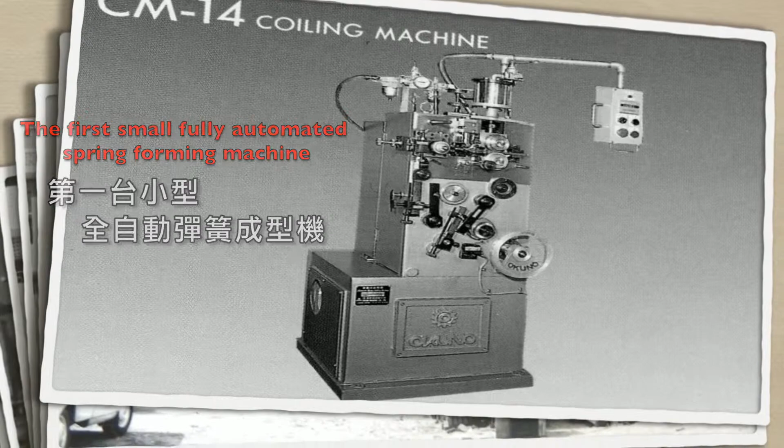A year after our establishment, SZS purchased an automated spring making machine from Okuno Mechanical Company in Japan. In 1968, a joint venture between SZS and Riken Industrial Spring Company established SZS Industrial Spring Machine Company.

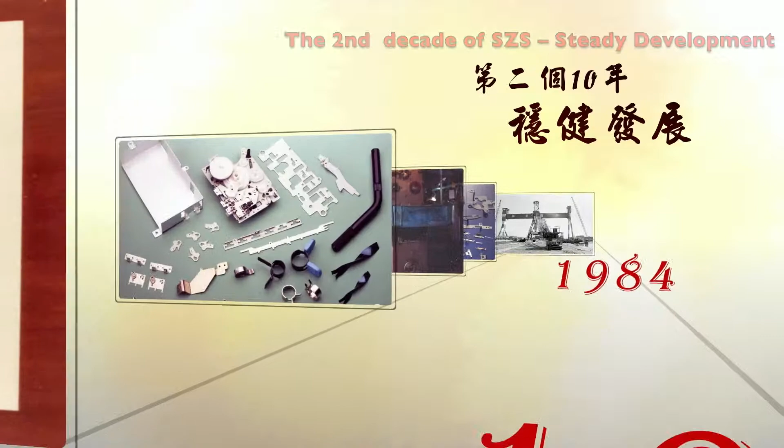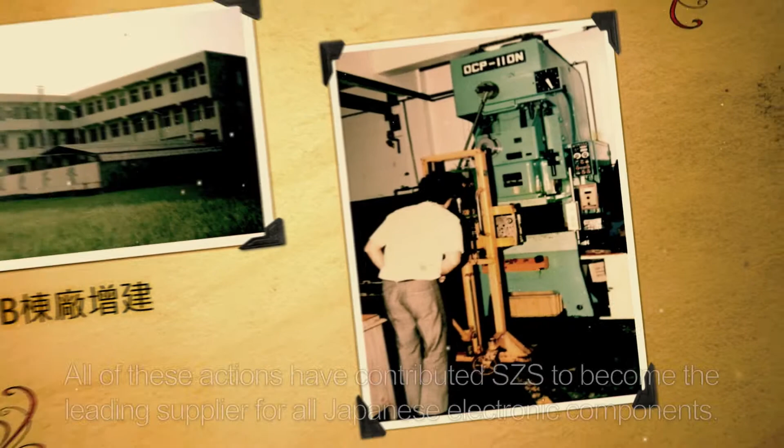In the early 1970s, Taiwan began its 10 major infrastructure projects that helped Taiwan become one of the developing countries in Asia. SZS was the first company to use ERP and HRMS to improve its efficiency and response time. To further accommodate other demands from our clients, SZS also established a new factory to include precision metal stamping and molding processes. All of these actions contributed to SZS becoming the leading supplier for all Japanese electronic components.

In 1990, SZS began its investments into the development of hinge machinery. Through training professionals and improving its facilities, SZS merged the techniques of lathe, stamping, and hinge manufacturing to satisfy any customer needs.

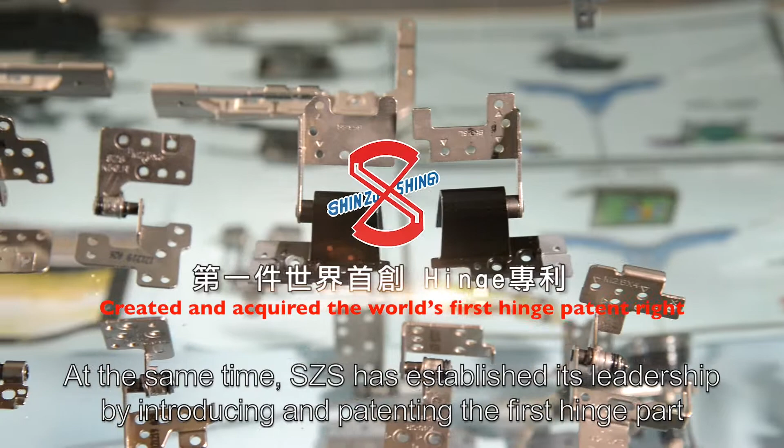At the same time, SZS established its leadership by introducing and patenting the first hinge part with tunable torque in the global market.

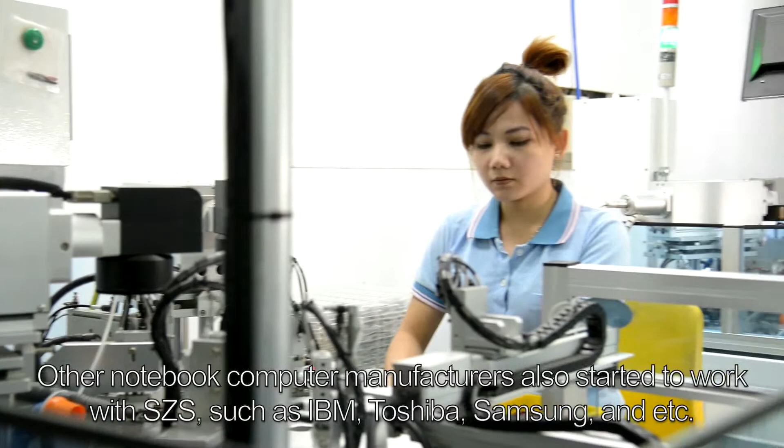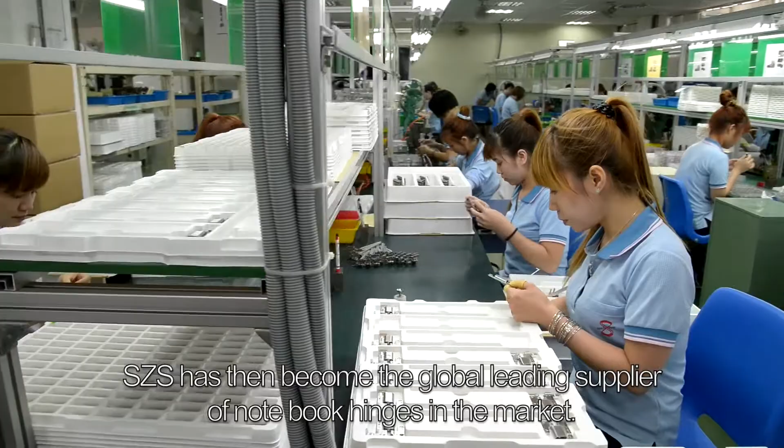Later on, the most reputed notebook computer company in the US, AST, began to cooperate with SZS. SZS recognized the growing demand to further invest in Factory Block C to increase its capabilities and capacity. Other notebook computer manufacturers also started to work with SZS, such as IBM, Toshiba, Samsung, and etc. SZS then became the global leading supplier of notebook hinges in the market.

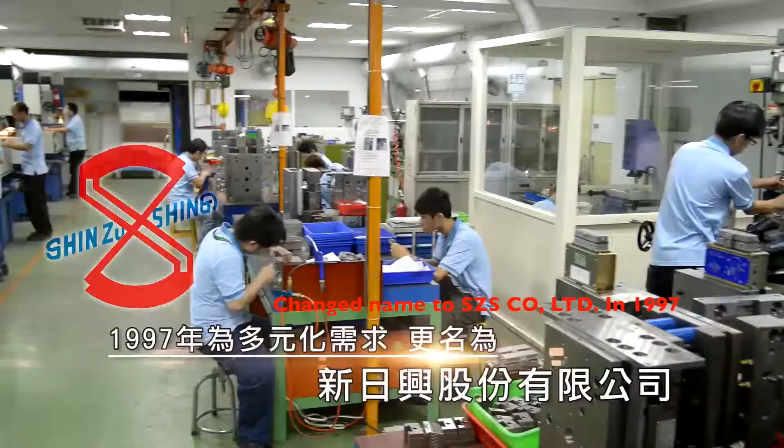SZS established its Factory D in Taipei and other manufacturing facilities in China to supply the growing demand from all around the world.

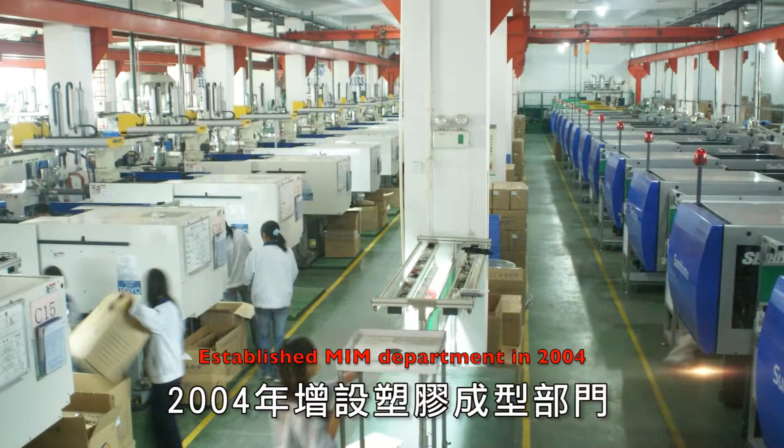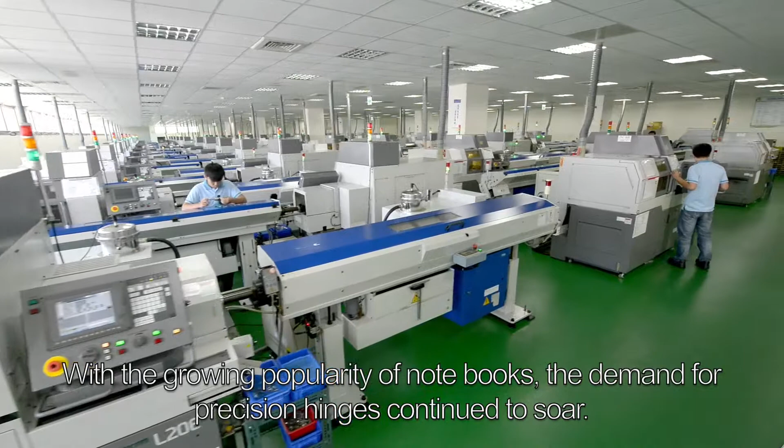With the growing popularity of notebooks, the demand for precision hinges continued to soar. As one of the key players in the supply chain, SZS has actively set up manufacturing facilities all around China.

IPO in 2007, SZS continues to set milestones for itself and establish its reputation as a leading supplier in the industry. SZS established its global footprint by setting up 4 manufacturing facilities in Kunshan, Dongguan, Chongqing, Fuqing, and a marketing office in Singapore.

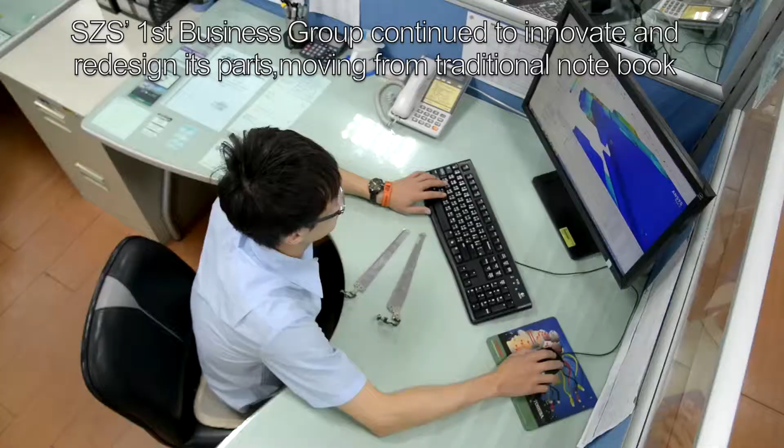With the evolution of notebooks becoming more and more lightweight and thin in sizes, SZS's first business group continued to innovate and redesign its parts, moving from traditional notebook hinges to hinges that have auto lock functions and a 360 rotatable hinge.

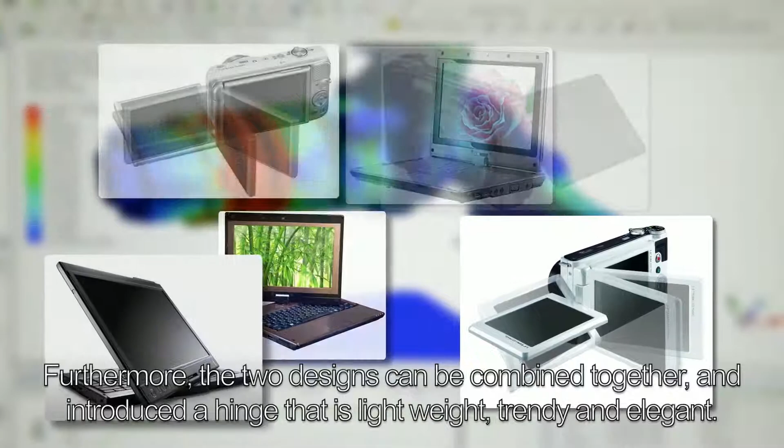Furthermore, the two designs can be combined together to introduce a hinge that is lightweight, trendy, and elegant. SZS also invested heavily in testing measurement equipment and software to enhance the quality and reliability of its products.

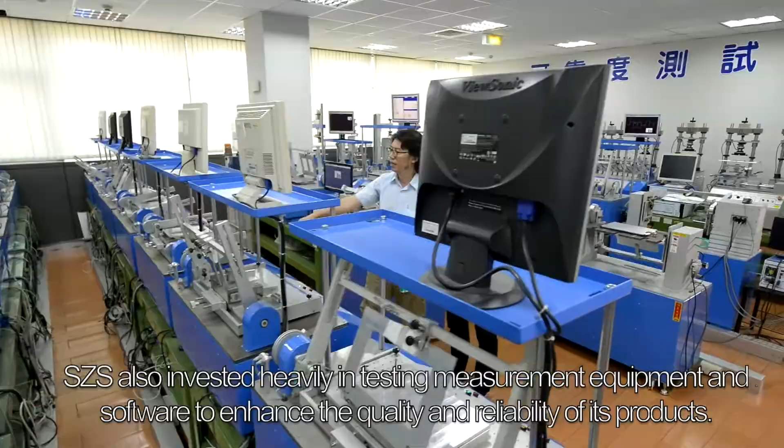Lastly, SZS's R&D team understands the importance of intellectual property rights and has managed and maintained its IP from design to creation. Today, SZS owns more than 1,000 global patented rights.

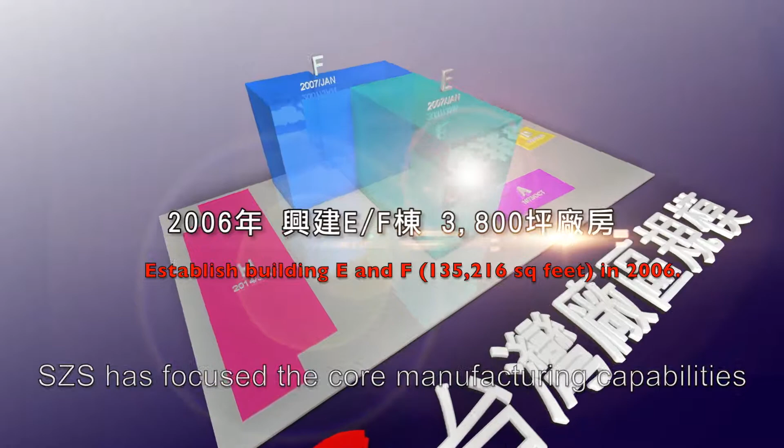SZS has focused its core manufacturing capabilities in Taiwan and has further set up factory buildings E and F. At the same time, it imported much precision manufacturing equipment and set Taiwan as the center of precision machinery.

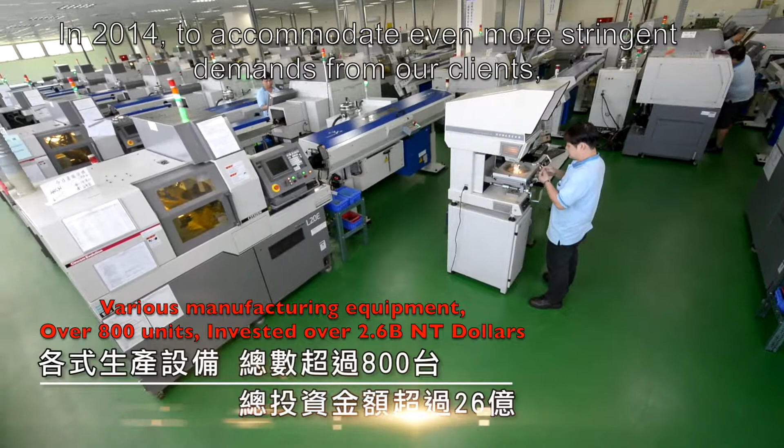In 2014, to accommodate even more stringent demands from our clients, SZS established Factory Building H and greatly increased our capacity more than ever.

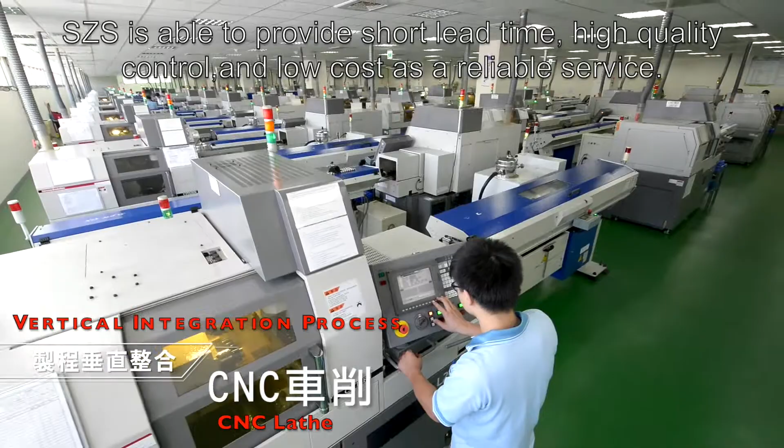SZS offers a one-stop production solution. With vertical integration and automated machinery, SZS is able to provide short lead time, high quality control, and low cost as a reliable service.

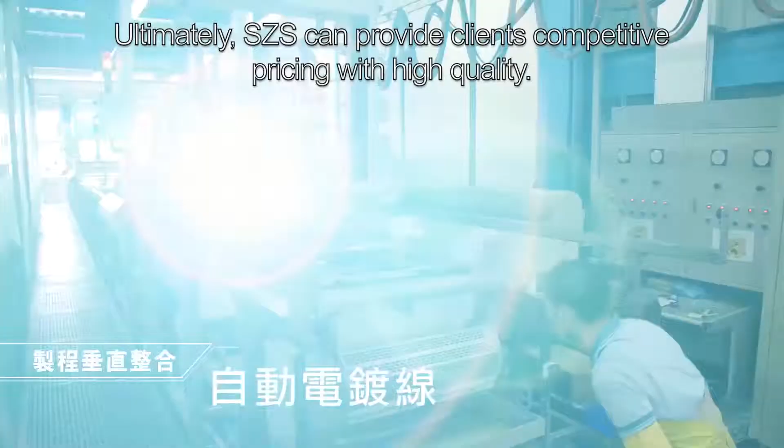Ultimately, SZS can provide clients competitive pricing with high quality.

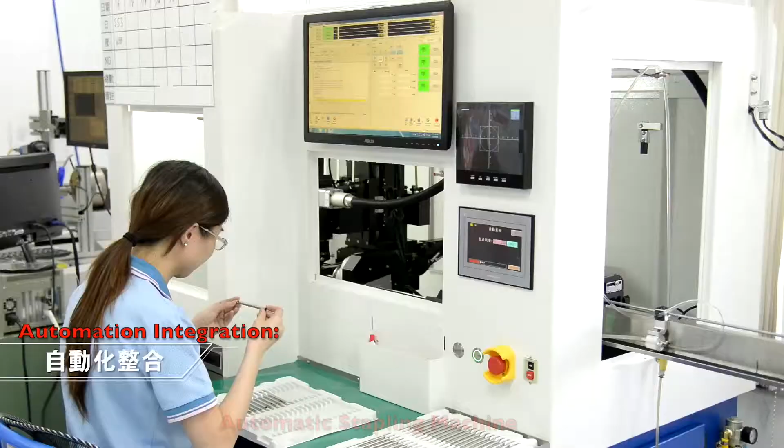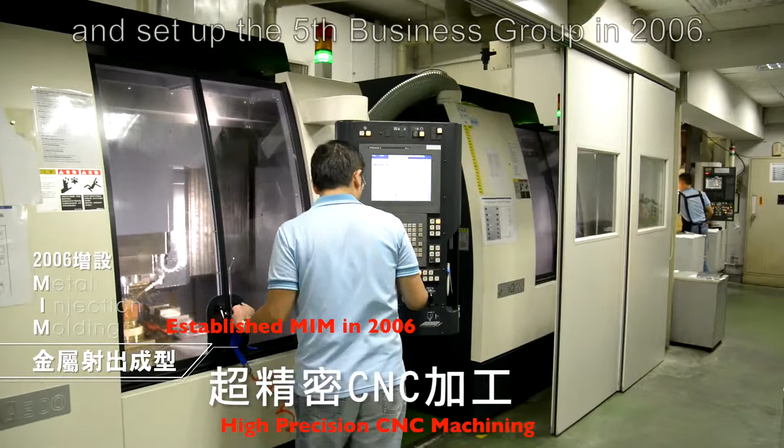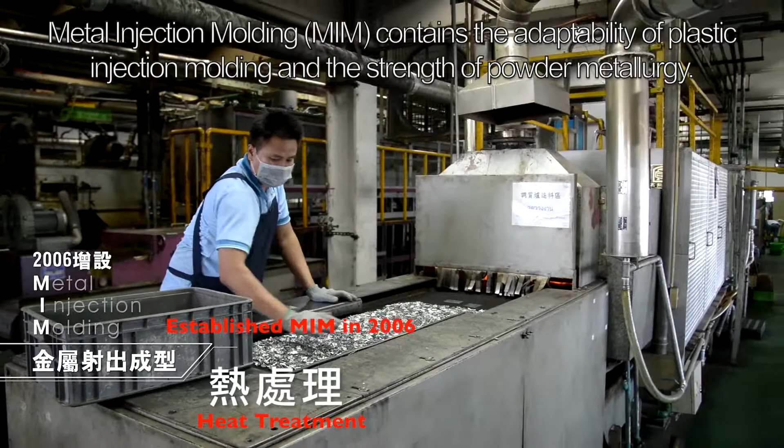SZS developed the core technical know-how of metal injection molding and set up the fifth business group in 2006. Metal injection molding contains the adaptability of plastic injection molding and the strength of powder metallurgy.

SZS has moved into a new generation by providing light, thin, tiny 3C electronic components for cell phones, tablets, and wearable smart products.

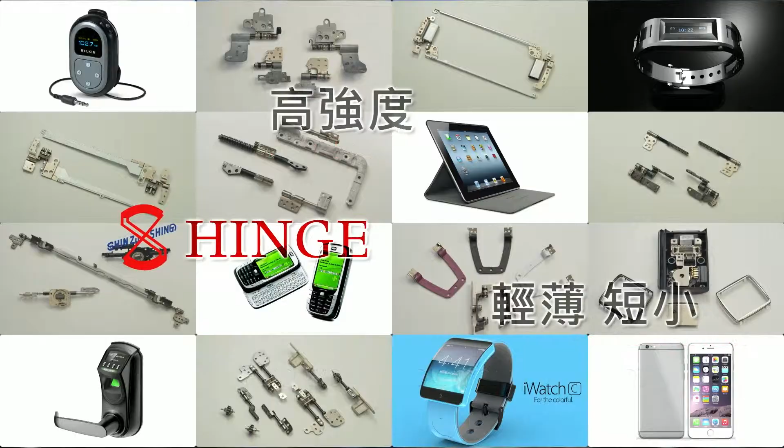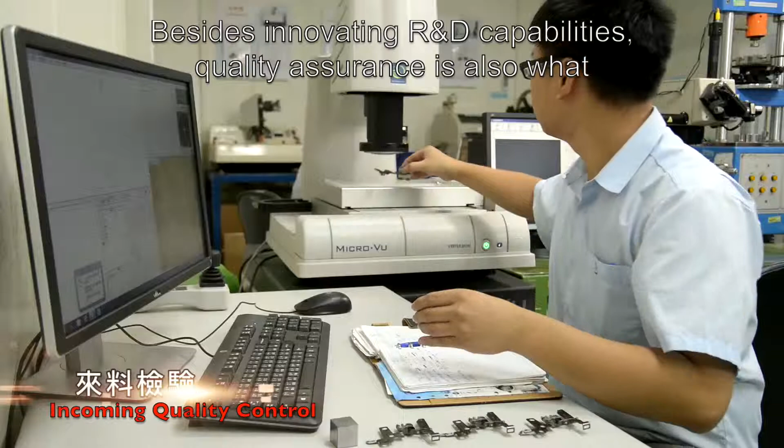Besides innovating R&D capabilities, quality assurance is also what SZS focuses on to provide added value to its clients. SZS's Center for Quality has evolved from using manual testing methods to utilizing 3D CT scanning.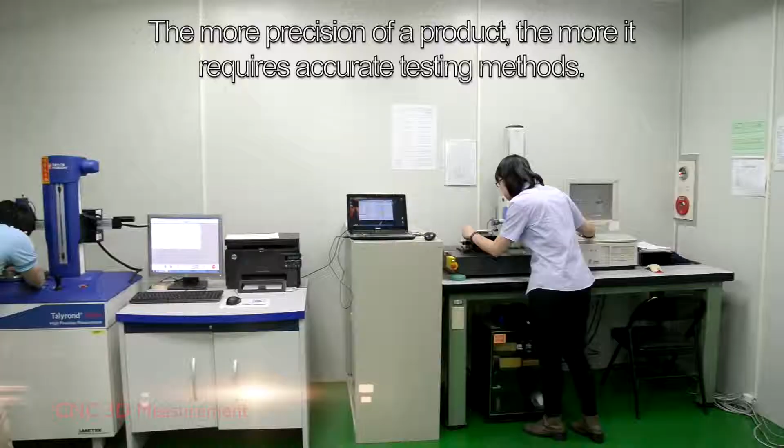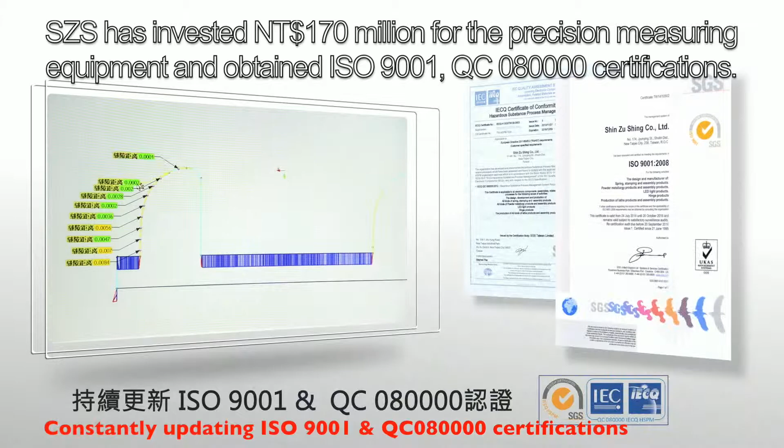The more precision a product requires, the more it requires accurate testing methods. SZS has invested 170 million NT for precision measuring equipment and obtained ISO 9001 and QC 080000 certifications.

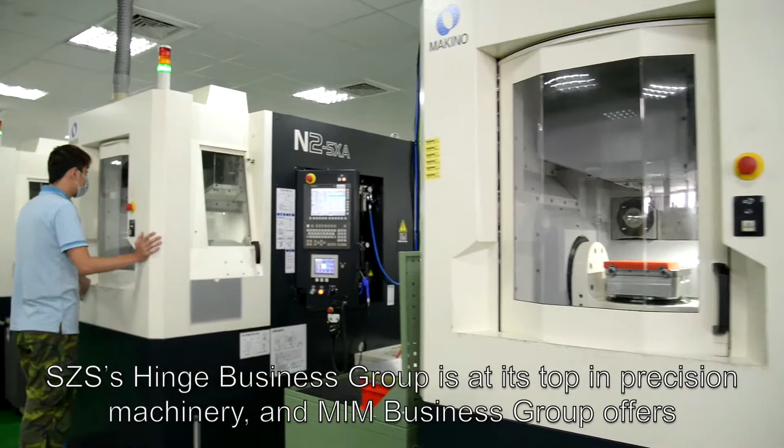For over 40 years of specialty, and 10 years of adapting to the environment and innovation, SZS's Hinge business group is at its top in precision machinery. And the MIM business group offers a diversified business that is slowly moving towards a 10 billion NT dollars yearly revenue business on its own.